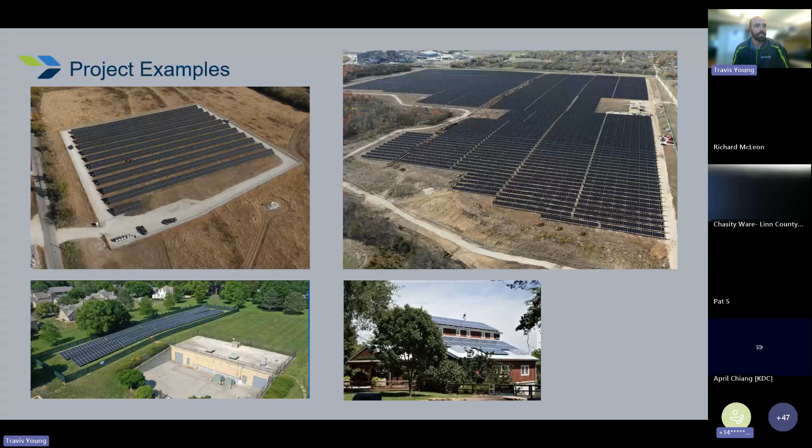Whoops, let's see if I can go back.

The big thing that everybody wants to talk about and is interested in typically is the incentives, which is obviously what's going to drive decisions on whether solar makes sense at one location or another.

The first important thing is understanding net metering and any limitations that might be there, and that some of your locations might not be in Evergy. In Evergy, we offer net metering up to 150 kW in Kansas, which allows your bill to be offset 1-for-1 on any energy produced during that bill period versus energy consumed. If you go larger than 150 kW, you move to what's called a parallel generation tariff, which just means any generation you push back to the grid gets a bill credit for that generation amount instead of the 1-for-1 offset.

So when you're doing that financial analysis for specific locations, that's going to be a main topic of conversation. Net metering is a major benefit. Any jurisdictions that don't offer net metering, or don't offer as advantageous a net metering option, are definitely lacking in helping solar move forward.

The other major benefit is the federal ITC. That's got a baseline of 30% for most projects.

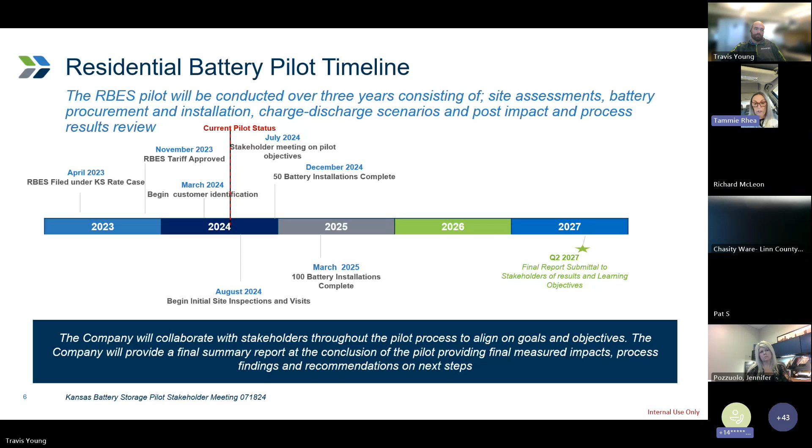Ultimately at the end of the pilot, we will take a few months to evaluate all the data, and our obligation is that in Q2 of 2027 we submit a final report to our regulators on the outcomes.

I'm going to stop for a minute before I talk a little bit about the technology that we're using, and see if there are any questions before we go on.

If not, we'll go to the next slide. Oh, sorry, one thing. You have something?

Yeah, so this pilot is residential, obviously not for commercial application, but Travis spoke a little bit previously about the potential for commercial application within the coming years. People are looking for potential partnerships, or we're interested in looking at these commercial applications. So if you're looking at a similar pilot, we'd love to be a potential partner.

Definitely. And so one of the drivers for our commercial pilot is a business demand response offer, right? Capacity is king in the world right now. We are a utility that is seeing growth, load growth demand greater than we've seen in the last 30 years. And 10 years ago, no one would have ever anticipated those super users, those data centers that are coming along.

And so load management is becoming key. I do see us in the future partnering with commercial customers, whether that's storage or other things, to help them participate in our demand response program. So again, this was a very small first step, toe in the water. But I was at a peak load management conference last week and met with companies just for that purpose, to look at those commercial applications.

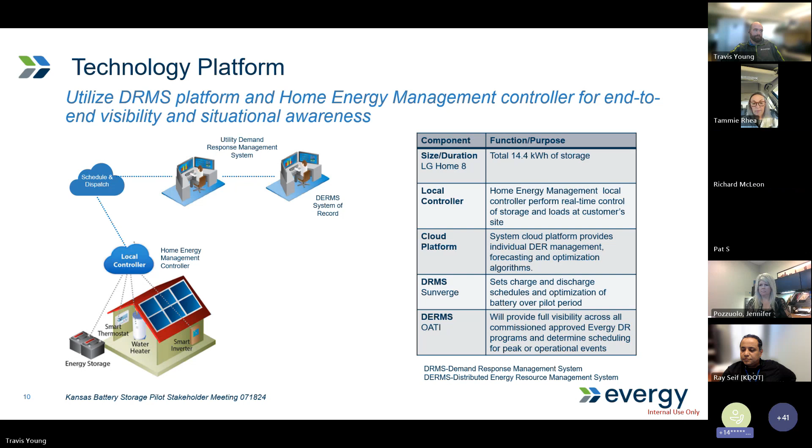Thank you, Tammie, appreciate the information. Keep us posted about the commercial applications, especially if you want to do any research or have a partner in that. Definitely interested in exploring that. I love that, yes, thank you.

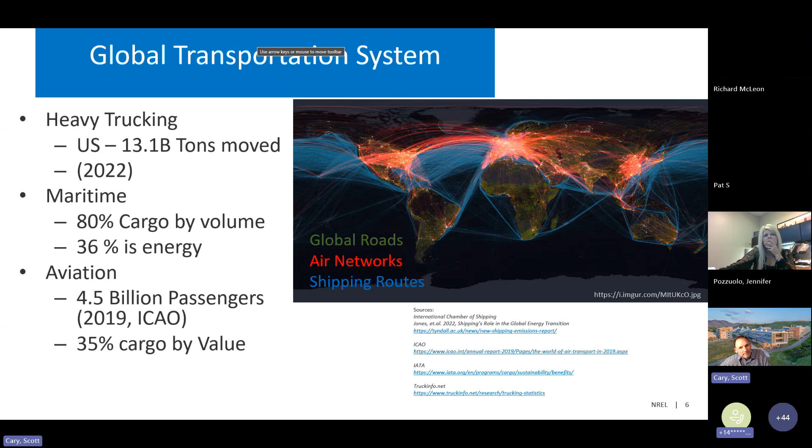As you look through the different discussions, NREL has been engaged in this since the late 1970s, looking at different opportunities to generate energy here in the US. And then how is that being used? A portion of that has to do with transportation decarbonization.

What ends up occurring is, depending on where you're at in that system, you may have different options. For our group, one of the main things we look at is how do we start with a clean electron and move passengers or goods? When we look at the technologies and where they currently exist, the smaller the vehicle, the more likely a battery might work, because you have extremely high efficiency in electric motors. But the energy density of the batteries is lower, though it's acceptable at this point on light duty vehicles.

When you go to heavy duty trucks, then you start to get a little more complex. What am I using it for? What's the distance? Is it going to be biodiesel? Is it going to be hydrogen at some point? Or is it a short route that makes sense that we can do it with batteries?

The key thing we look at is what's the most efficient way to turn an energy carrier into movement. The fewer number of phase changes, or changes in how the chemicals are set up, increases the efficiency. So if I can take an electron and put it straight into a 98% efficient motor, that's probably the most efficient way to do it.

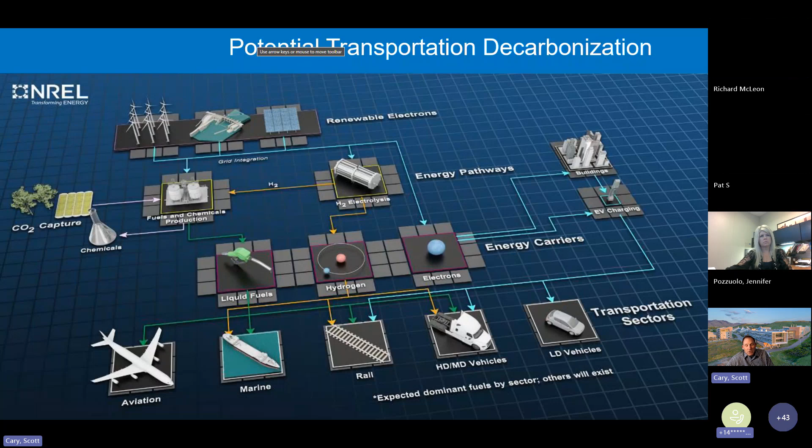When we get to aviation, because of how energy dense petroleum is, it's petroleum lookalikes—it's Jet A. There's been a long effort, going back to, I think, since at least 2006, which is when CAAFI was formed, to look at using alternative fuels as jet fuel replacement. So when we talk about sustainable aviation fuels, it is a Jet A equivalent drop-in fuel, with a few exceptions in terms of trying to deal with some of the unique characteristics within current jet fuel, this component called aromatics, and how those interact with existing engines.

Internationally, there's a goal both at ICAO and IATA, and also within the federal government of the United States, to decarbonize the industry by 2050. Within the US, that's turned into the SAF Grand Challenge recently. It's been moving along for 20 plus years. Just recently, it's like, okay, we have enough pathways and ways to make these products that we're pushing that forward. So now the goal is 3 billion gallons by 2030.

Possible, but it's a stretch. It's an extremely fast scaling occurring, with the intent of 35 billion gallons by 2050—replace all the petroleum in aviation by 2050 with alternative biofuels.

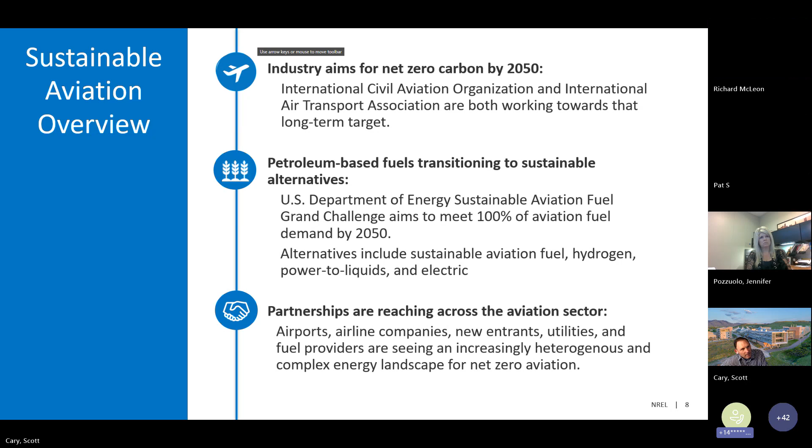As you start to think through this system, we get into this discussion of how are we looking at energy efficiency? How are we looking at transportation of energy carriers? What are characteristics of the system that may change depending on how we put this together?

As an example, if you use an electric motor to turn a propeller, your noise profile changes. You may be able to use smaller motors and come up with a different way of operating, or a different form than what basically in the 1950s everyone came to as a tube and wing. Part of that has to do with how the engines are set on the wings and where the fuel can be carried in the wings, as an example.

And you start to chase through those systems. At the same time, if you start to think about these potential new energy carriers or methods, you get into the discussion that we have a very successful and well-capitalized petroleum supply chain system around the nation and around the world—so how do any of these new technologies fit in? Similarly on electrification, just like you heard a minute ago, there's mass scale occurring. How do we keep up?

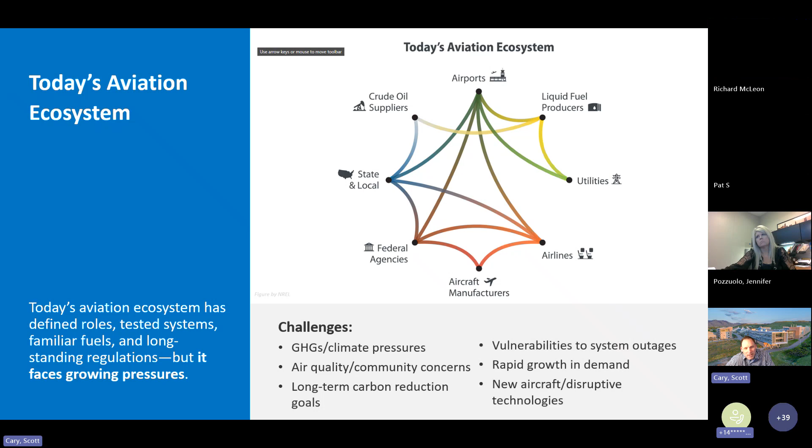So the way the system currently works is your airports, they traditionally have had your fuel supplier, have to interact with the fuel suppliers, utilities, the airlines, and then your state and local agencies, because they knew that petroleum system was there to back up what they need and to make things work. But what we're seeing is this is transitioning. It gets really messy, and so how do you plan? How do you think through those different solutions? As everyone is trying to ask for more power across these systems.

We kind of look at this as NREL is not aerospace, but what we do is we think about the system as the energy components that run through aviation. And so the fuels, the energy carriers, the airport and the airspace that goes with it. And then how does that tie into the aircraft and the components that may go through that?

And there's trade-offs in that system. What's your power reliability you need? Resilience posture, is it this discussion that was just had about whether it's cost effective to include batteries in your system. If you're a 24/7 critical facility, is your diesel generator what you want? If you can do demand response, as an example, with your utility, is that something you want to consider as part of your system? And you can make your generators last longer. Those are the type of discussions we get into in terms of kind of the trade-offs that occur.

And then what does your community want? We're starting to see more lawsuits popping up around leaded gasoline for general aviation, as an example. And the unleaded is moving. It is expensive. Each of the legacy aircraft have to get their own special type certification to be able to fly, from what we're hearing. And we'd love to get, if there's others on the phone that have better inputs, we'd love to get more information there.

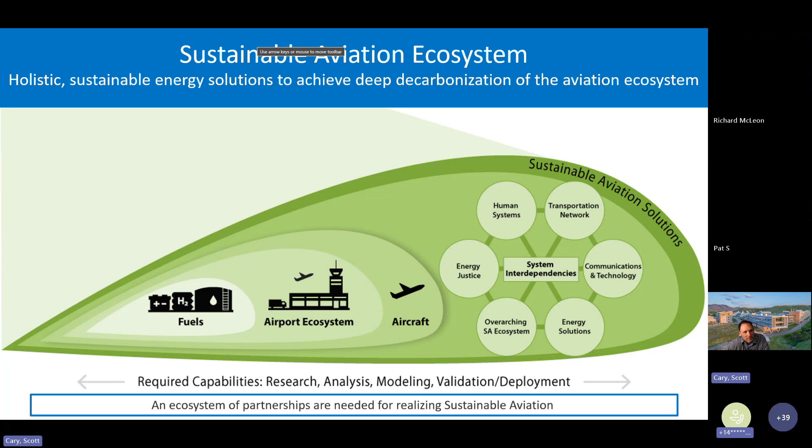4 different energy carriers we currently keep track of. SAF is your traditional biofuels. That's your biodiesel, that's your ethanol to jet type of pathways. E-fuels is clean hydrogen, turn that into, use some type of CO2 upgrading source, liquefy and blend it, and then turn it into a jet fuel lookalike. E-fuels, the big thing is the technology is there. It's just expensive, it's more expensive than SAF, which currently cannot compete directly with petroleum just on a straight cost basis.

Hydrogen, the big place with hydrogen right now is the infrastructure, and then scaling for cryogenic, so extremely cold cryogenic hydrogen for aircraft. There is still need around reshaping the aircraft, because the way hydrogen wants to be stored, it doesn't want to be stored in wings. It likes to be stored in spheres, in terms of to keep it cold and insulated. And then the electrical system as well, as you move through that.

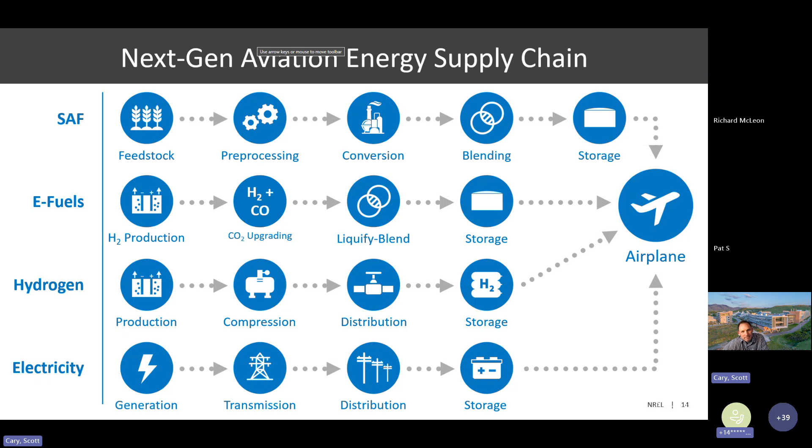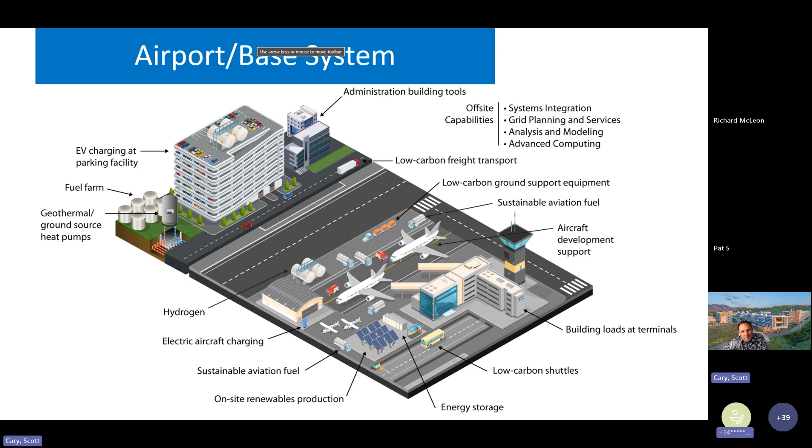Real quickly, we look at airports as small cities, and the question is, which of the assets do you need to look at, and how do you want to put those together for your specific mission? Whether it's local medevac, whether it's emergency response, if it's typical GA operations, realistically, it's what parts and pieces come together around those systems to help make sure you can do what you need to do every day, which is move passengers and goods.

So within the aircraft, there's typically a layer of components as well that become important. And so, just as an example, helping the FAA right now, we're doing analysis to help them develop policy for hydrogen aircraft. One of the questions is, well, how do you know if you have a leak, and how big of a leak is something you have to worry about?

If you talk to the space industry, you're going to get a different answer than if you talk to our labs, because in terms of how we look at those risks, where does the FAA want to come into those situations? So there's like a whole safety and sensing program just on keeping track of leaks and understanding how all those systems might work.

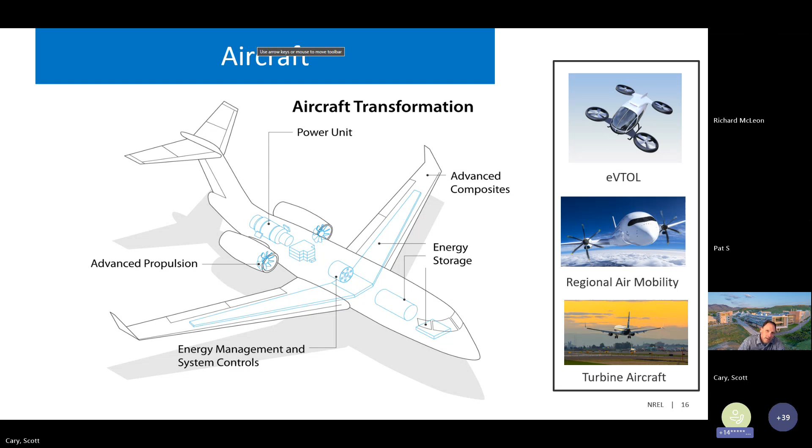Just in the last week, the Department of Energy has put out two new publications around SAF deployment. If that's of interest, we can share those as well, looking at the status of where we're at and where we're going in terms of those programs.

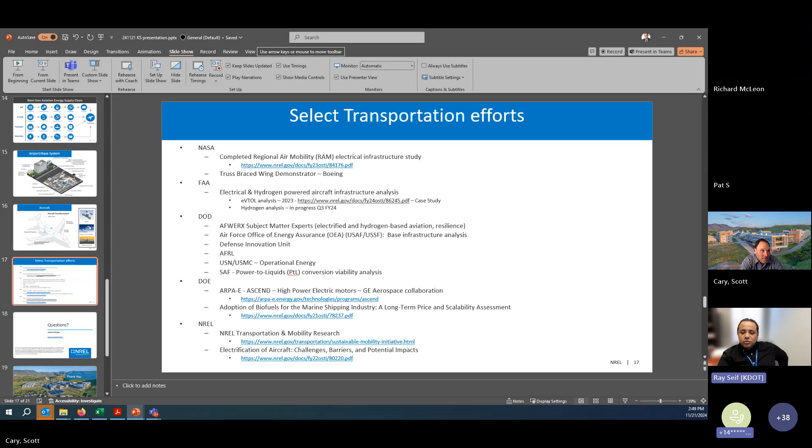First of all, if anyone on the call is interested in a SAF discussion, we are likely going to ask NREL to give us some feedback and information about SAF, but we'll get that under a different group. So if you're interested in learning more about sustainable aviation fuel and how it could potentially benefit your communities, or how you can potentially work that into your community, please feel free to reach out to me. It's obviously a little bit of a different discussion than this general scope of the emerging aviation technology, and we do have some stakeholders that are interested in that discussion.

So we'll reach back out. Any questions? All right, with that said, is Ben on the call? Mr. Campbell? Yeah, I am. Hey Ray, how are you doing? Fantastic, thank you Ben. Ben with the, actually I'll let you do the introductions, feel free to jump on. Thank you very much, sir. Yeah, absolutely, thanks so much.

I appreciate the time here today. My name is Ben Campbell. I'm a principal research engineer at the University of Illinois, Chicago, and I'm also the assistant director of the On-Site Energy Technical Assistance Partnership that's funded by the U.S. Department of Energy. I manage the central region of the On-Site Energy Technical Assistance Partnership. Today I'm just going to highlight some of the resources available through the Technical Assistance Partnership and some of the federal incentives that are available. Travis touched on the ITCs during his presentation, so I'll try not to spend too much time on that.

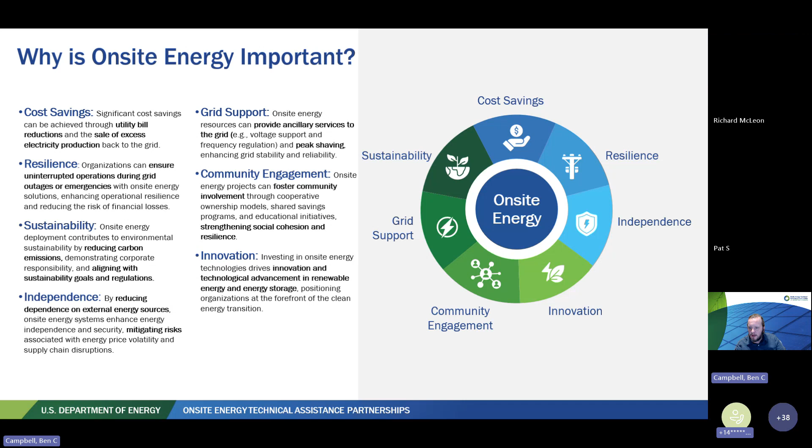There are a lot of benefits from on-site energy technologies. The main benefits that most end users are interested in are cost savings and sustainability impacts, but there's also energy independence and energy resiliency as a benefit, preventing your facility from going offline.

To go over the on-site energy TAP resources and how to work with the TAP, you just need to reach out to me or my director, Cliff Haefke. So you contact your regional TAP, and we'll set up a meeting with you to discuss site characteristics, goals and objectives, how your airport facility uses thermal and electrical energy on site, and how much your demand fluctuates on site, to identify technologies that would work best for you.

We'll collect some site data. Typically, the minimum data that we'll collect is 12 months of natural gas and electricity bills. It's also really helpful if we can get interval demand data for some of our technologies to model.

Then the on-site energy TAP will do a techno-economic analysis and perform screenings for multi-technology options within your facilities, and provide simple payback, incentives that are available, and the savings that you can expect from installing a variety of on-site energy technologies. Then finally, we'll set up a meeting and review the results with you and talk about next steps that the Technical Assistance Partnership can provide.

We're really there to sit on the end user side of these negotiations and provide non-biased third-party information for a lot of these technologies.

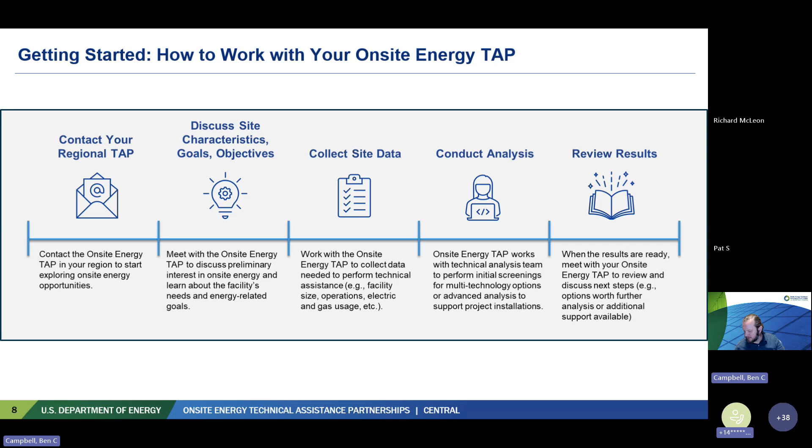When we look at site attributes, we really want to focus on what technologies are going to work best for what sites. If you have high electric rates, renewable energy systems as well as cogeneration systems can be a good application, but those high electricity costs make heat pumps less favorable.

If you have high demand charges, battery energy storage systems can help with demand curtailment, as well as combined heat and power systems. As natural gas rates start to go up, that's when heat pumps become a more favorable technology.

And then, what are the land conditions, the open space conditions that we have on site? Do we have available roof space for photovoltaics, land space for wind or photovoltaics?

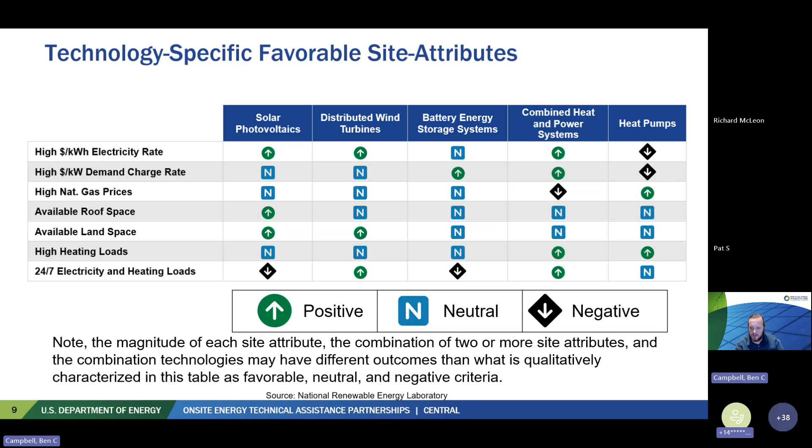And then what are the heating loads and how do they compare to the electric loads on site? When we see concurrent heating and electricity loads, that's when wind turbine systems and cogeneration systems can be really beneficial in driving savings at a facility.

I also just want to highlight, we'll generate a simple payback as part of our analysis, but we'll also look at the emissions impacts based on where you are regionally on the grid. We'll use your regional grid emissions factors.

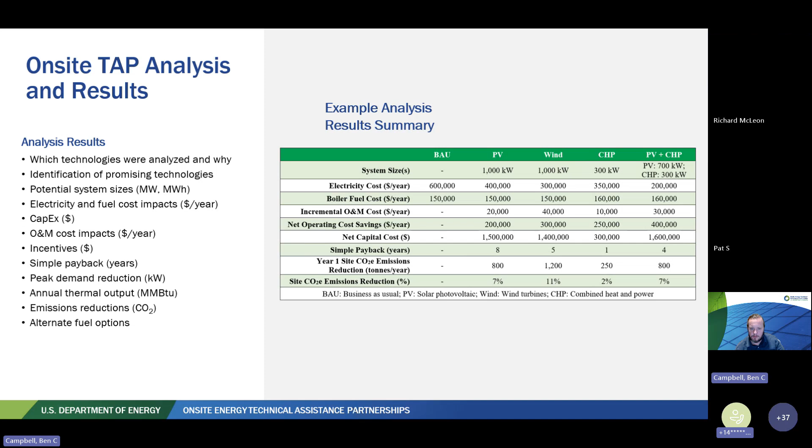And then there's a domestic content bonus. You can get an additional 10% federal investment tax credit if the system is manufactured in the United States. Legally, I think the definition is that 60% of the steel that goes into the project, including rebar that's going into the concrete that would be supporting the project, needs to be produced domestically. So it needs to be U.S. steel.

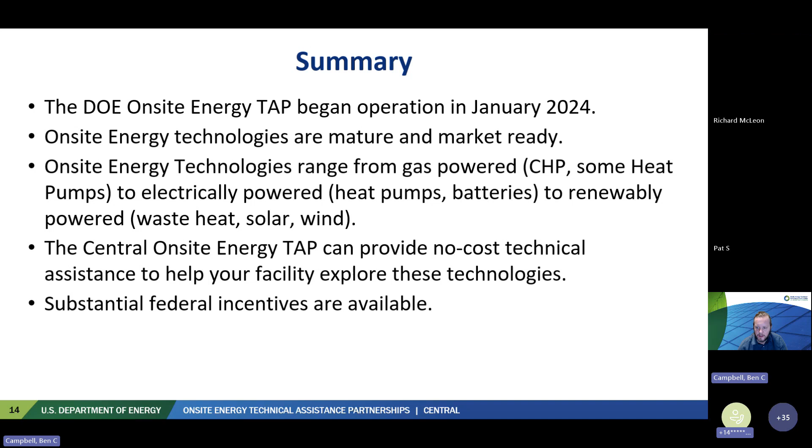And I'd like to say thanks again, Ray, for giving me the opportunity to speak here today. I'm happy to answer any questions anybody might have. Thank you, Ben. I really appreciate it.

No cost, or prepaid through federal tax dollars — I appreciate that just the same. I think there's a lot of value in that service for our communities, and I would love to put that information out there. I hope we don't inundate the office with calls, but I would hope that every single one of our communities reaches out, because they need to understand what their energy loads are and what their needs are, not only for immediate needs, but how they can take care of those. And if they're in a good place with energy resilience — having on-site solar is a prime example, they have on-site solar, they have a battery system that serves them immediately, but it also puts them in a great position to take advantage of emerging trends in aviation that are all going to be electrified or hybrid technologies. So getting them in a great place now, getting them great return on investment now, especially if there are grant dollars available to do that, that's an absolute win in my book.